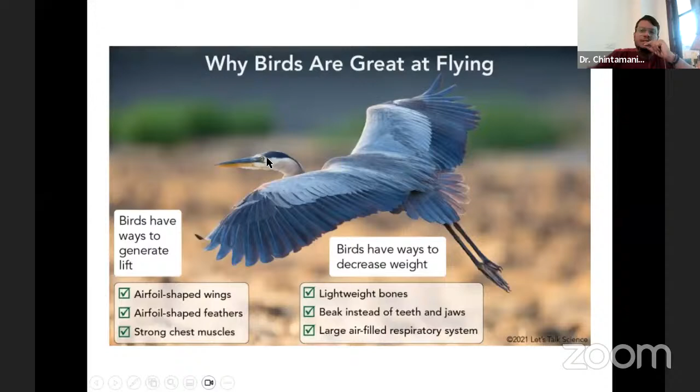Human imagination is always far ahead of reality, and it is that imagination which inspires us to bring these concepts into reality. There is no limit to imagination. Even if you're not in a lab, or don't have access to technology, there's no limit to your imagination, and I think it's important to imagine and then materialize your thoughts about how to go about execution.

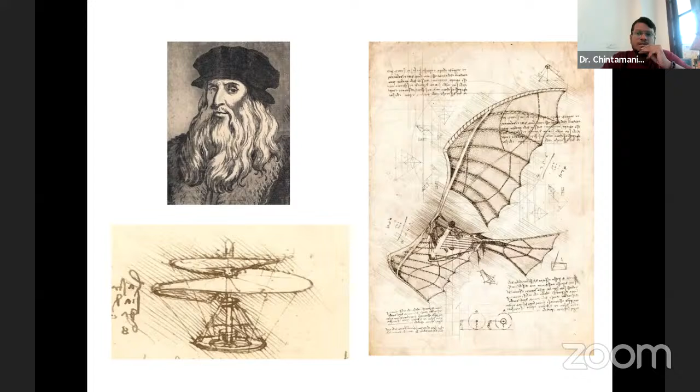These are early attempts where people built mechanical structures and jumped from high altitude, and there were actually deaths also. So my point here is, whenever you are researching a certain topic or experimenting, it's always needed that first you work out a worst case scenario - what are the hazards you should highlight - and accordingly plan your research or experimental activity.

Especially for school students, it's very important when they carry out experiments in certain projects. It's really important that with their school teacher they highlight and carry out the worst case scenario - if this experiment doesn't work properly, what are the worst aspects to deal with.

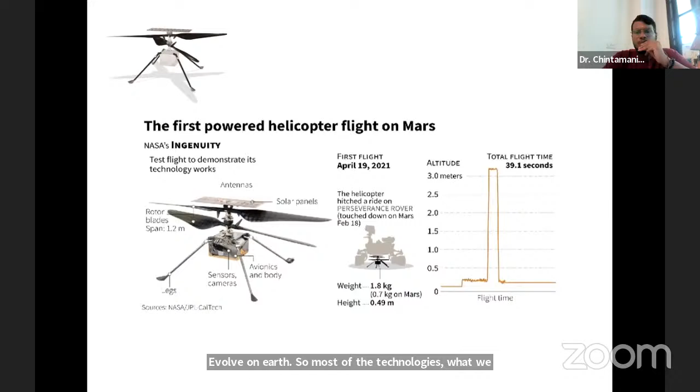I'll not go much into details of this slide, where you can see how this drone has covered the path on the Martian surface. In future, as Elon Musk is thinking about human settlement on Mars, we may have such drone-based vehicles where humans can go from one point to another, or these drones can carry out operations to study the Martian surface with sensors and devices.

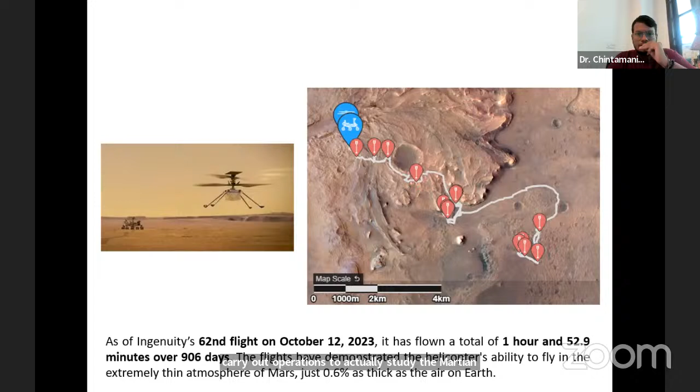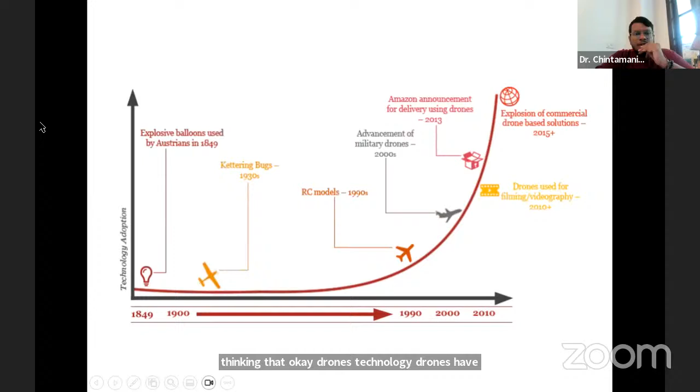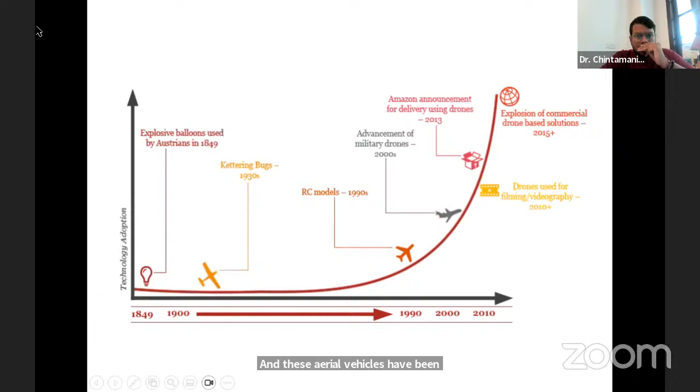Going to the history of drones, you might think drones have evolved only in the past 10 years, but it is not so. Drones come under a generic category called unmanned aerial vehicles, and these have always been explored by us long back. The very first case of an unmanned aerial vehicle, in the form of an explosive balloon, was used by Austrians in 1849.

Unfortunately, people only think about technology when a war scenario comes, where human imagination is pushed to the limits. Whenever war scenarios have come, technologies have been pushed to the limit, and these technologies first come in the war domain, the military domain, and then we think about their civilian applications later.

That is the scenario. So this is where the concept of unmanned aerial vehicles started evolving, in 1849, and then in 1903 the Wright brothers had their first flight, and it started evolving further. Even in World War II, people thought of unmanned aerial vehicles for military applications, where we don't want to utilize a pilot - if we lose a pilot, it is much more loss than losing a machine. So people thought about such unmanned aerial vehicles from World War II onwards. I'll show a few slides.

Then, from 2010 onwards, drones started being used for filming and videography, and civilian applications started emerging. It's very important for researchers to come up with more civilian applications, because they have an immediate impact on society and societal benefits.

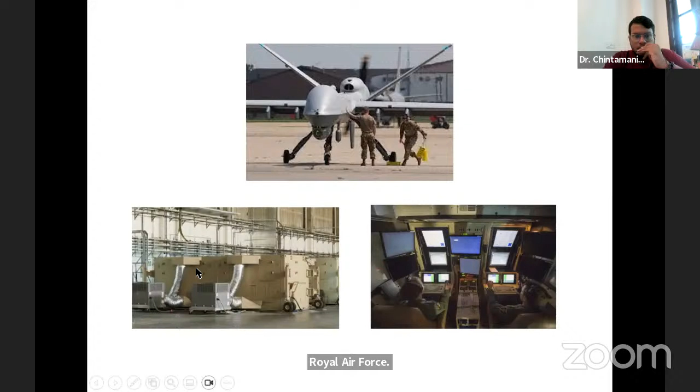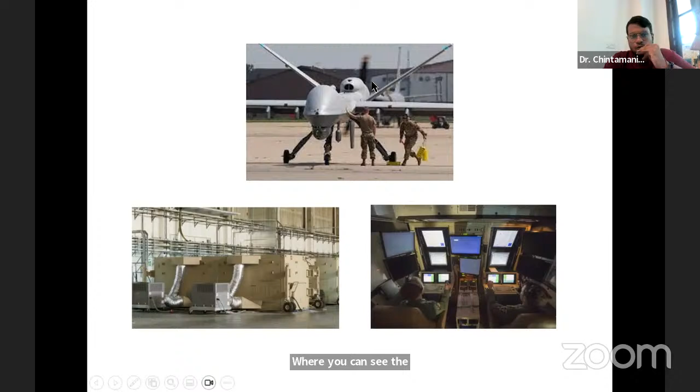This is the recent scenario where you can see these are the freights - not the freights for goods transport, but inside that you're actually having a mobile unit where Royal Air Force pilots are controlling these huge drones being used for military and defense applications. So wherever there is a need, the whole unit can be mobilized.

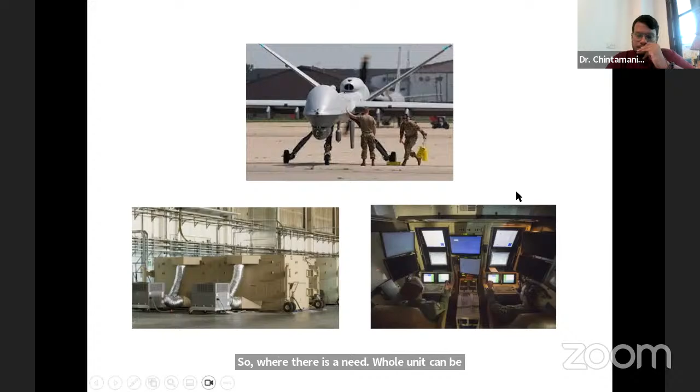This is one of the interesting articles - it talks about mass market military drones, which have changed the way wars are being fought. Some of you are interested in international relations and following geopolitics - the whole current Ukraine-Russia conflict is being completely twisted by drone technology.

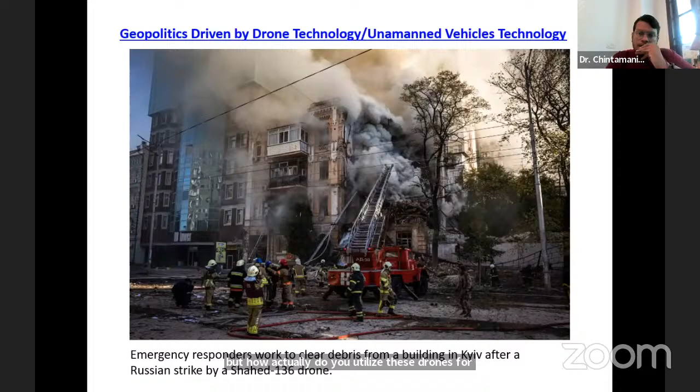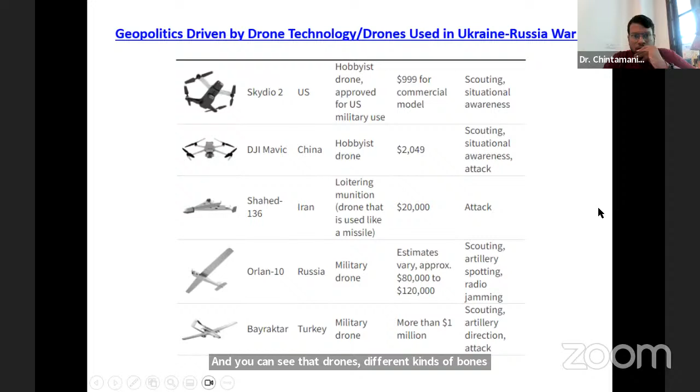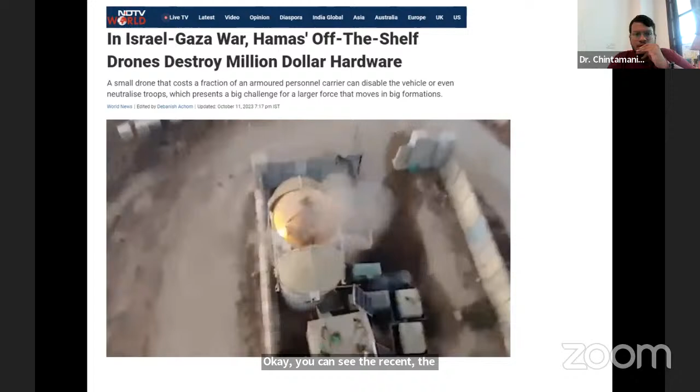The whole point is that drones shouldn't always be used for military applications, but how to utilize these drones for civilian applications like agriculture. But the reality is that such drones are being utilized for military applications - you can see different kinds of drones, with costs starting from $1,000, being utilized for geopolitical purposes. You can see the recent Israel-Gaza war where drones were utilized for surveillance and monitoring. So far I have been talking about the international scenario and geopolitics.

Not that we are behind. DRDO has been very much investing and having interest since the 1990s to develop such drones. These are known as Rustom and TAPAS drones, being developed by DRDO completely indigenously for surveillance and monitoring.

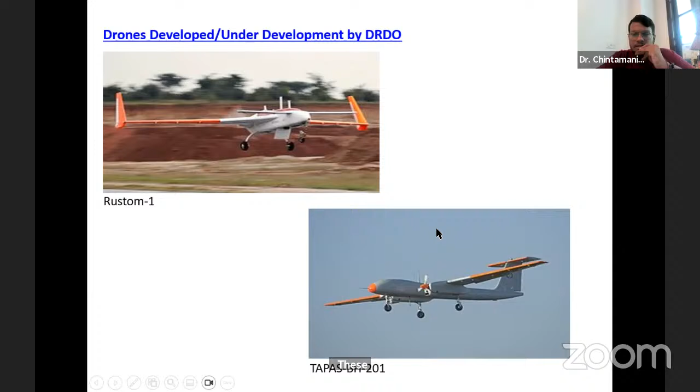All of us as researchers have a responsibility to come up with such societal applications of technology.

In fact, there was a very big event organized in Uttar Pradesh last year at the Air Force Station Hindon, which showcased the status of drone technology in India. Not only military drones, but survey drones, agricultural drones, fire suppression drones, and logistic drones were actually showcased during this event.

So from a student's perspective, there are so many domains through which you can contribute to drone technology. All of you present here, you may be from some of these backgrounds, and you might be thinking that you have to be an engineer or a researcher working in drone technology, but that is not so.

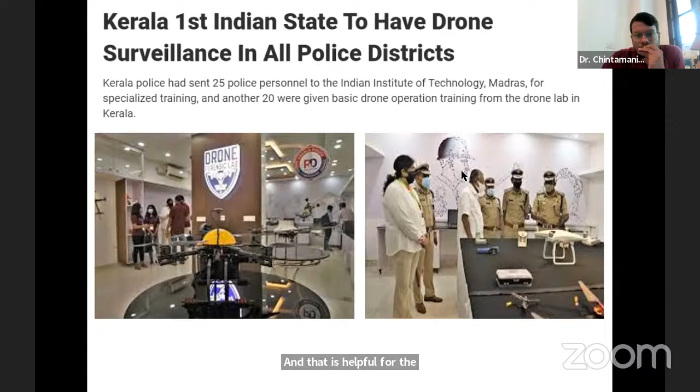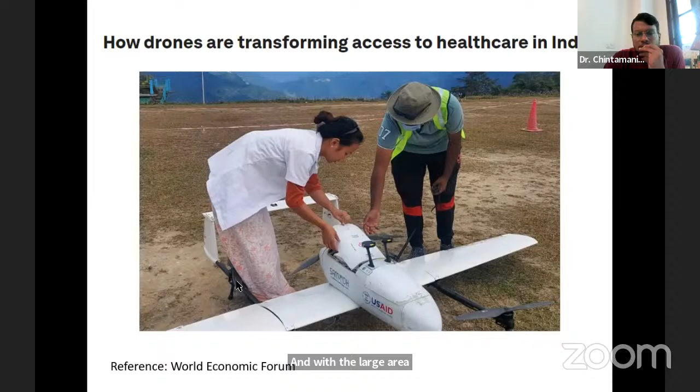During the COVID times, there have been initiatives in India, especially in the Northeast, where fixed RC wing drones were utilized for supplying medicines, and with a large area network, these drones were sent from one location to another.

And even in Dehradun, Tata came up with a fixed wing drone-based service where they could supply medicines.

As I spoke about drones in agriculture, there are different applications which I'll try to cover based on the time we have—I think we have one hour, right? So I'll try to cover the slides.

There are different schemes launched by the Government of India. One is the Kisan Drone scheme, where if you have the official farmer certificate, you can buy a drone at 50% subsidy. It all started with the liberalized drone policy which came into existence in the year 2021, and subsequently different initiatives and policies with respect to different domains were launched.

Coming to the overall application of drones, you can have hobby drones which are being used for fun, recreation, photography, racing. There have been racing events also, so if there are engineering students or school students present here, they can actually participate in such racing events. The commercial and military aspects I have already covered, so I'll go to the next slide.

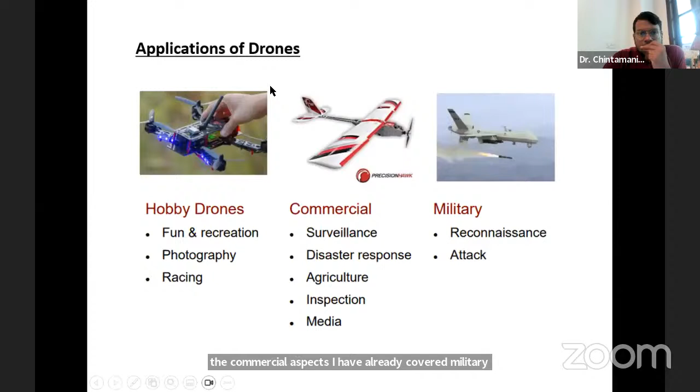The applications of drones - even these we have covered somewhat. Coming to agriculture in detail, I have slides on agricultural applications also at depth, but depending upon time we'll decide if those are to be covered.

From the agriculture perspective, you can utilize drones for crop health analysis, understanding the nutrition or water levels, detection of pests and diseases by making use of hyperspectral sensors. Generally, most of the time, people are utilizing drones for spraying fertilizers and pesticides. That has been the frequent use for drones in India, and very less utilization is being done for soil analysis, but these are also applications one can have using drones.

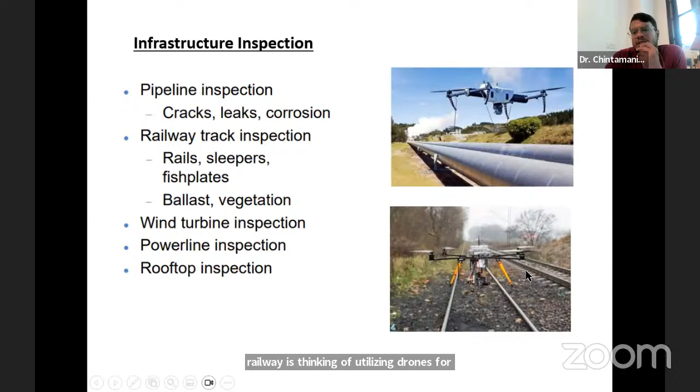India has the largest railway network in the world, and Indian Railway is thinking of utilizing drones for monitoring, surveillance, and there have been sometimes terror activities also. So to stop these activities, drones can be utilized apart from track inspection.

India also has pipelines for water, gas, and oil, and these pipelines also regular inspection can be carried out using drones.

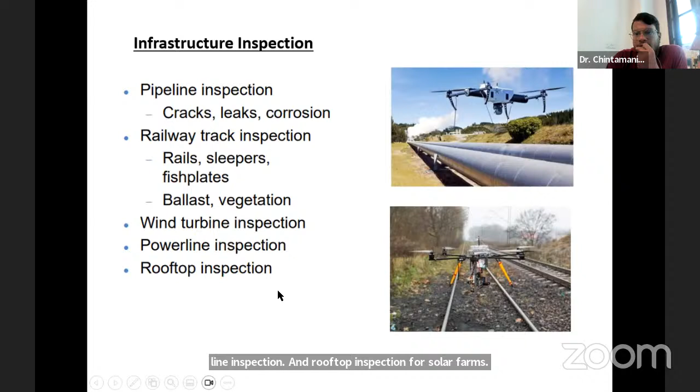The other emerging areas where drone technology, drone-based services are coming up - lots of company startups are coming up in this area. One is wind turbine inspection, where on a regular basis you have to inspect wind turbines if there is a damage, and accordingly the report has to be created. A power line inspection and rooftop inspection for solar farms, where drone technology is playing a very significant role.

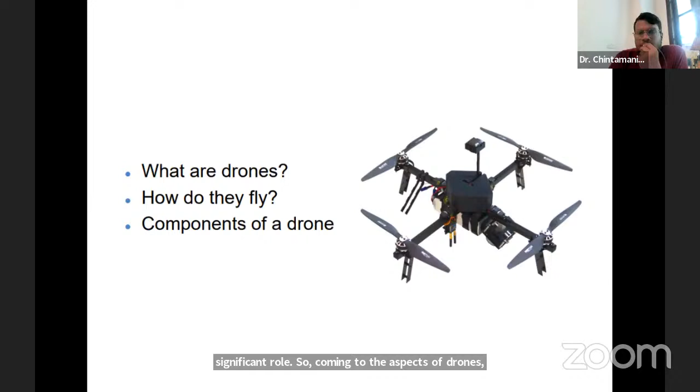Coming to the aspects of drones, I'll quickly cover what do we mean by drone, how do they fly, components of drones - this is a basic aspect we come up to.

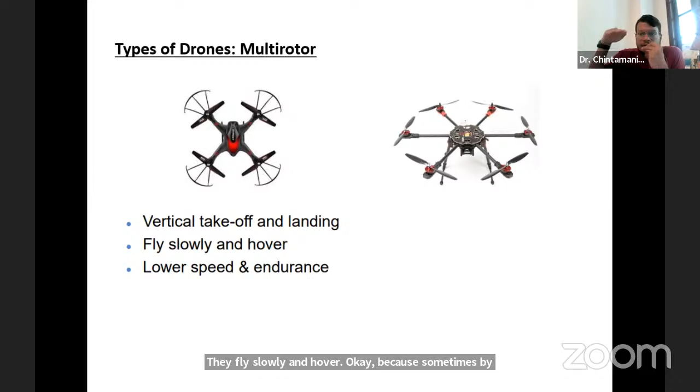Generally what we see is a multi-rotor drone where you have these propellers. Generally the number of propellers vary - minimum these are like four, and then they start increasing in numbers. These multi-rotor drones are capable of vertical takeoff and landing, they fly slowly and hover, because sometimes by hovering at a certain distance you can carry out measurements, whereas when you are moving you cannot carry out these measurements. Depending upon the propellers, they are called quadcopters, hexacopters, or octocopters.

Why do we increase the number of propellers? Because suppose if it has to lift a heavy object, then it has to counter gravity, and the more gravity you have to counter, you need to have more thrust. So to do so there is no option than increasing the number of propellers, and even maybe the size of the propellers, because that much thrust has to be created to counter the gravitational force.

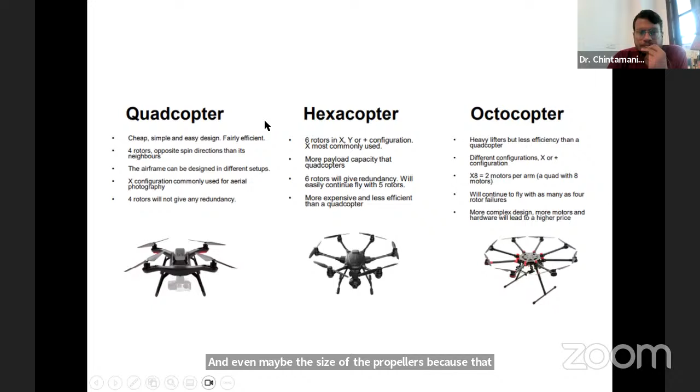Then you come up with other kinds of drones which are called fixed wing drones, where there are not so many propellers. You can see the flying bird-like structure - you have a wingspan, and then at the front or back you have a propeller. These kinds of drones cannot fly slowly or hover. They require a small airstrip to take off and for landing, and wherever there is no such strip ready, you need to actually launch them from a launch pad. You must have seen in the past slides where typically for military applications they are kept in shells, and then launched from the shell where there is no need for an airstrip.

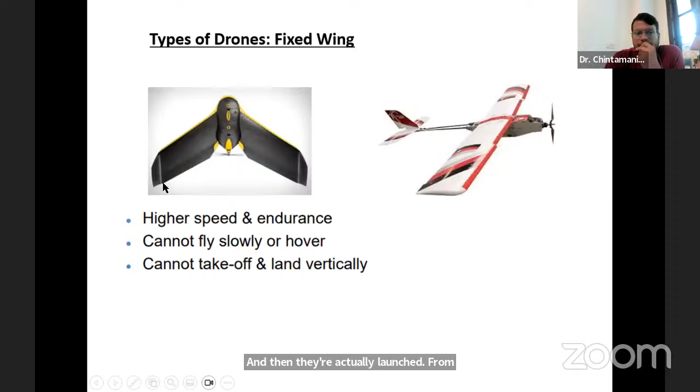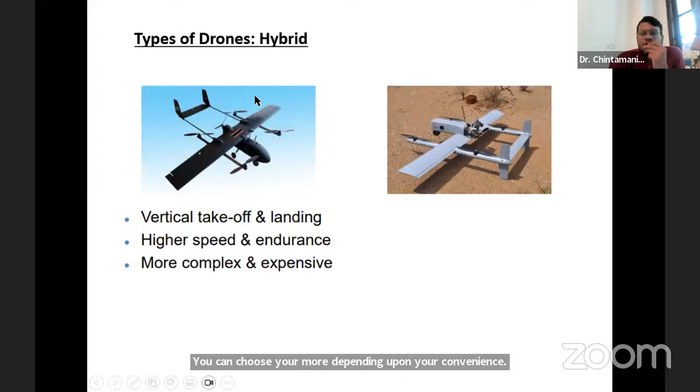Then you come up with hybrid drones, which utilize both properties we have seen earlier - the multi-rotor aspect and the fixed wing aspect. Typically military drones are made in such a format because depending upon the conditions, or if the airstrip is damaged, you can switch into the multi-copter mode where you can have vertical takeoff or landing, or where you have to go at very high altitude carrying out surveillance or monitoring, you can switch to a fixed wing drone. Or if there are disturbances in weather, you can choose your mode depending upon convenience. They are complex to build and expensive, so not many drone companies will offer hybrid drone based services and products - mainly for military applications you will come across such drones.

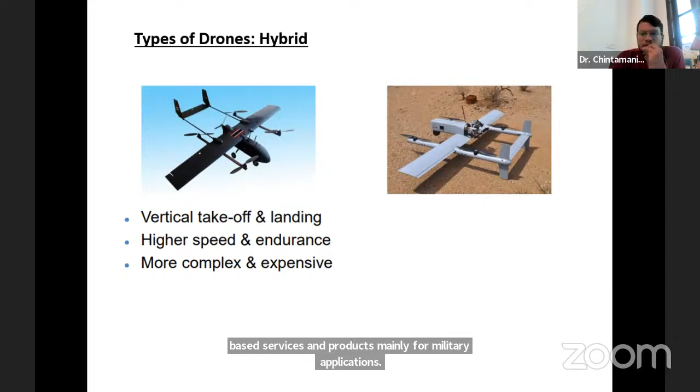So what kind of sizes do these drones have?

So you must be thinking, okay, what can be such an application? It's not just for spying. Suppose you are a zoologist, or you are studying animal or bird behavior. You want to study birds, but you don't want to send a huge drone like this because the behavior will be altered. So you will send this kind of drone where the birds will not get agitated, and you can actually study the bird behavior or animal behavior using these kinds of drones.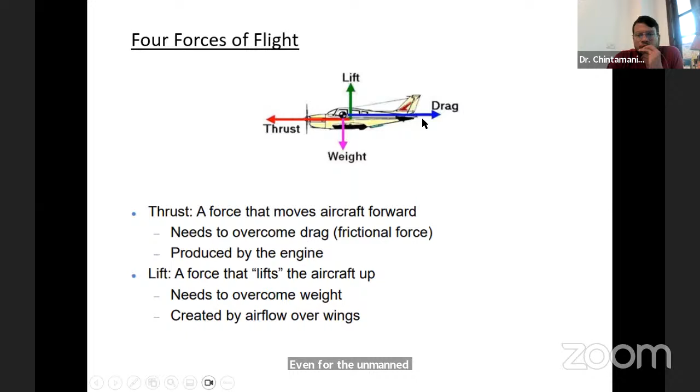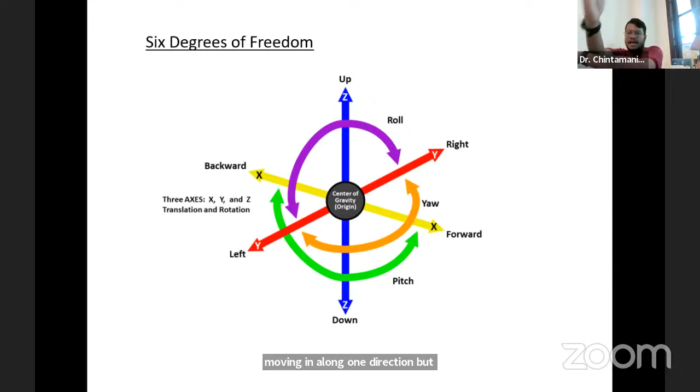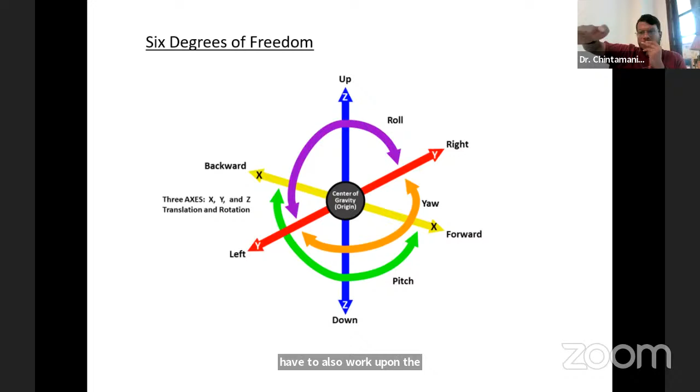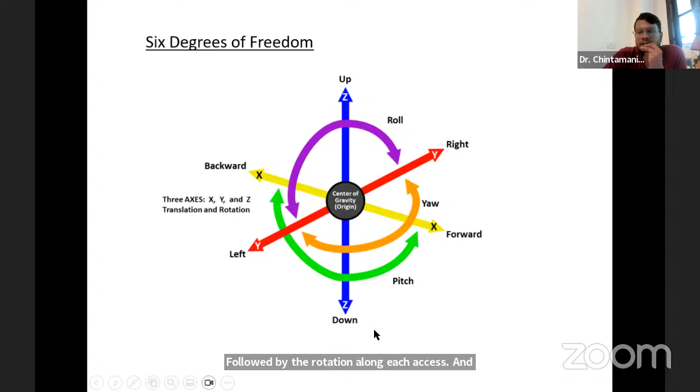And then when you have a drone, you are not just moving along one direction, but there are three directions - x, y and z axis. And for efficient flight, you have to also work upon the rotation of drones along these axes. So typically, you are having a translational motion along x, y, and z axis, followed by the rotation along each axis. The combination of these movements will result into an efficient drone trajectory.

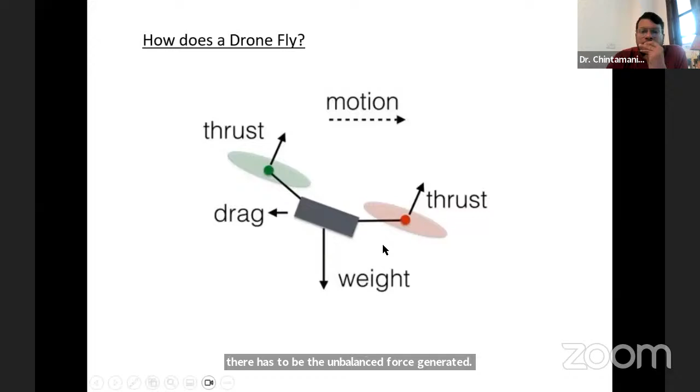So for example, if the drone has to move forward, it has to have an unbalanced force in this direction, because then it has to tilt - otherwise there is no unbalanced component, without which the drone cannot move forward. So to generate thrust, there has to be an unbalanced force generated. Accordingly, one has to deal with the rotary aspects of the propellers.

Okay, so coming to the components of drones, I'm sure most of you are aware of them. So you have a frame, then you have a motor - this is a brushless DC motor to which the propellers are attached, and the rotational speed of these propellers is controlled by separate speed controllers. If there are nano drones, the speed controllers are actually on board, through which the rotation of these propellers is maintained.

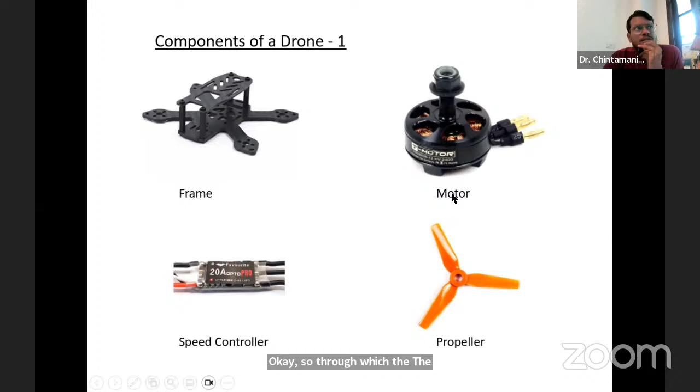Then you have a flight controller, because that is like a CPU - it distributes power, it distributes the signals to the propellers, and you can actually put your own code for the flight trajectories. You also have the radio control mechanism - you have a radio receiver at the drone end, and if you are manually or autonomously controlling, you require a transmitter and the drone battery, because everything requires power.

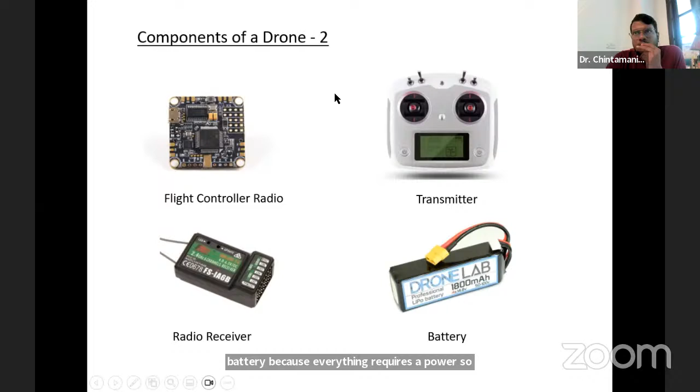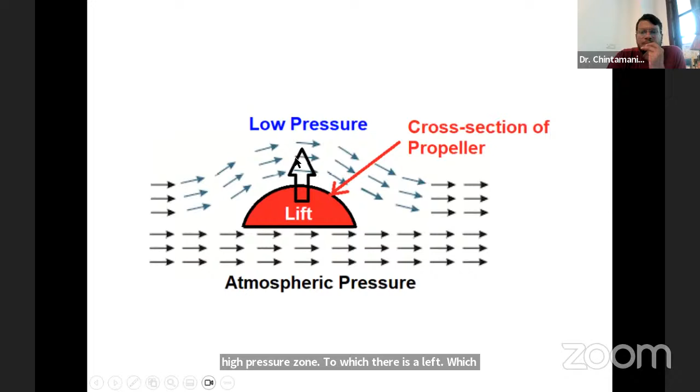In case of the quadcopter or multicopter drones, you are actually creating such low pressure and high pressure zones through which there is a lift which counters the gravity. That is the basic principle behind the multicopter drones. So by having multiple propellers, you are creating a thrust which will counter against the gravitational force.

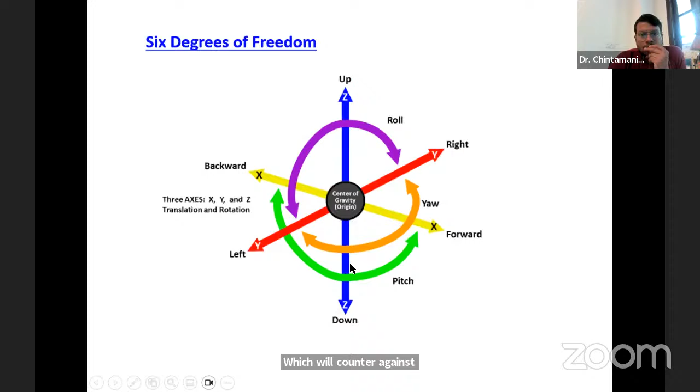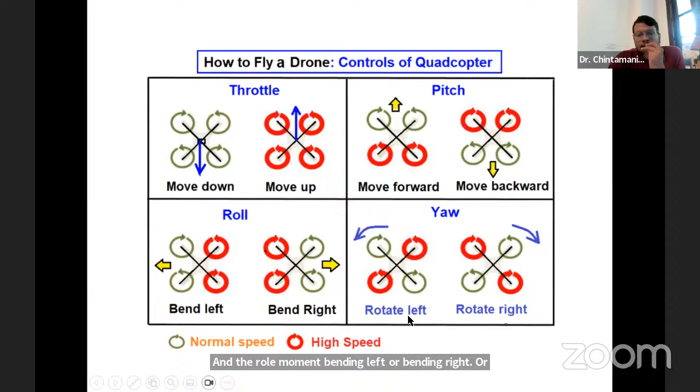Depending upon how these propellers move in certain directions, you can have different kinds of motions, like throttle going up or down. You have a pitch movement moving forward or backward, and a roll movement bending left or right, or rotating leftward or rightward.

I'll try to skip this because it's not a very technical talk I want to give. Students who are interested can always build an in-house laboratory for drones.

Generally when we deal with drone aerodynamics, there are computational aspects where you can simulate drones, simulate the airflow around drones, and simulate the thermal or mechanical stresses being generated in drones, so you know how your frame is airworthy.

You can also carry out experimental aspects of drones. I am from the experimental background, so I mostly love carrying out experiments. There are lots of techniques used in drone technology, or aeronautical engineering generically, where you can visualize the airflow around an object using laser-based systems.

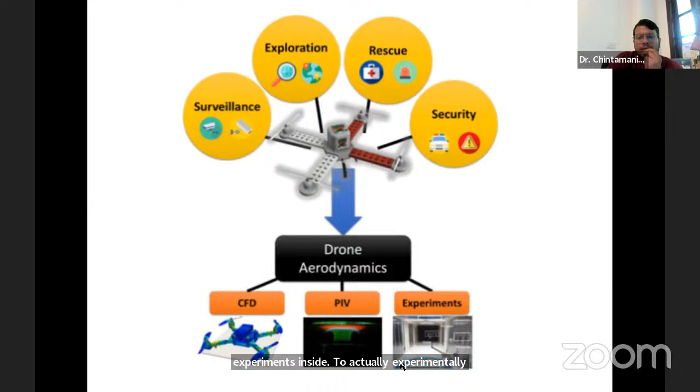You can carry out experiments inside a wind tunnel to experimentally measure pressure, temperature, and study the flow around drones. One can set up such a system integrated with a computer, where you can design your own propeller and see what kind of thrust it is generating.

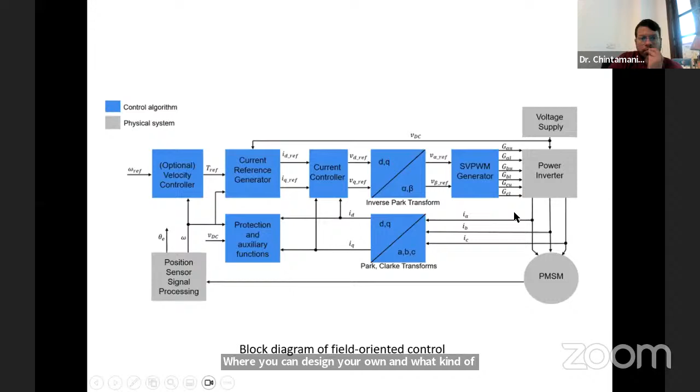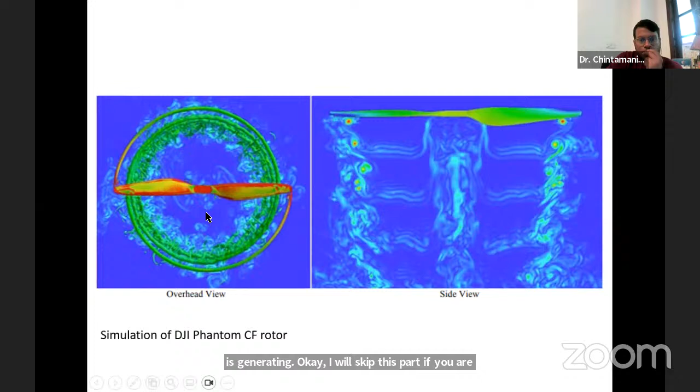I'll skip this part. If you are interested in simulation, you can design a propeller, simulate how it rotates, and see what kind of airflows are being generated.

These are like commercial systems one can have, called load cells. You can test different kinds of motors and propellers at different RPMs to study the airflow and the thrust they generate.

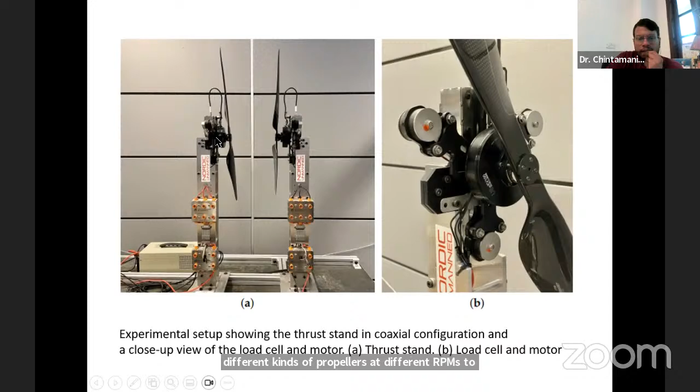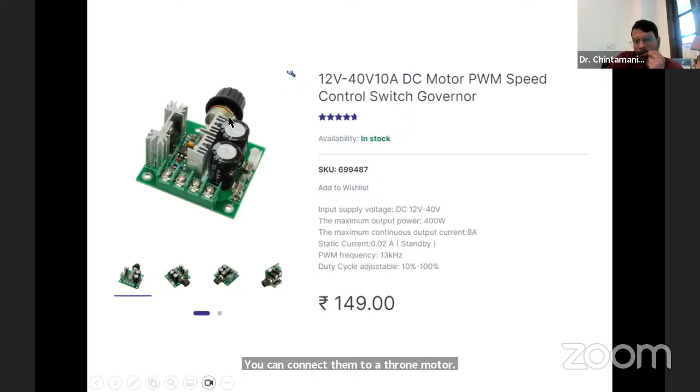If you go online, you can buy low cost pulse width modulated speed controllers. You can connect them to a drone motor, vary the speed, and study the motion of propellers.

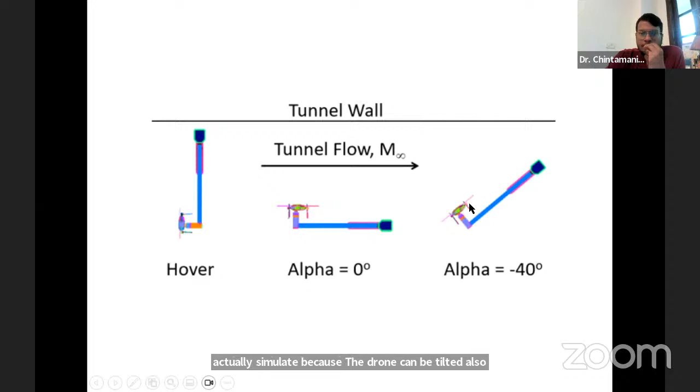Accordingly, the propellers, as they rotate at certain RPMs, can be mounted inside a wind tunnel, and the flow characteristics can be studied. You can study them through computer simulations, and then the results can be matched with the wind tunnel studies.

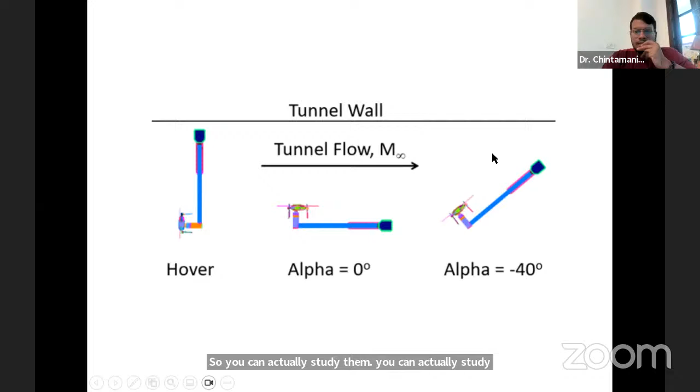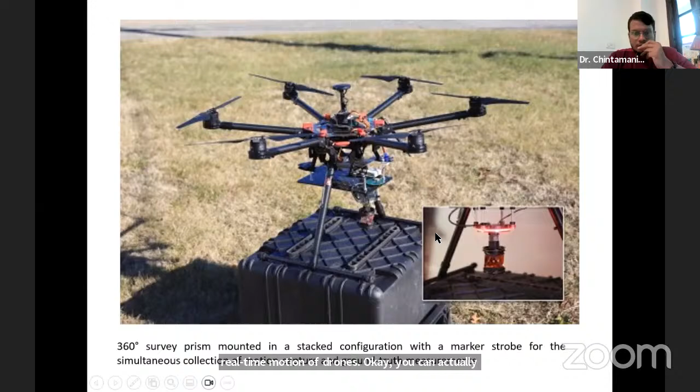There are such systems in which you can carry out the real-time motion of drones. You can deploy nodes attached to the drone frame, and these are captured by what are called motion capture cameras, which are capable of capturing millimeter scale motion of drones.

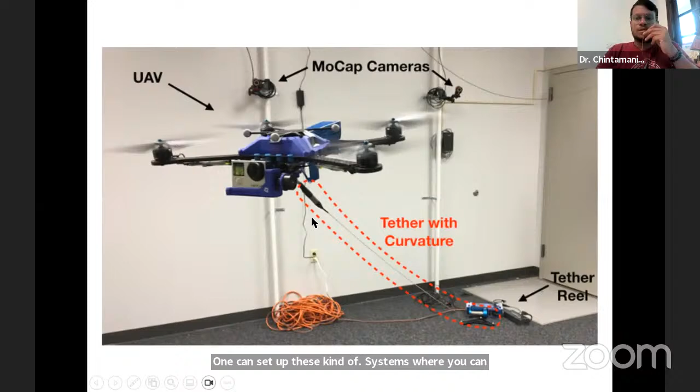If you are designing your own drone frame and want to carry out stability analysis, one can set up these kinds of systems to analyze drone frames. You set up a volume with motion capture cameras and nodes deployed on a drone frame. These systems are actually being utilized by the US Air Force and US Army, and even in India.

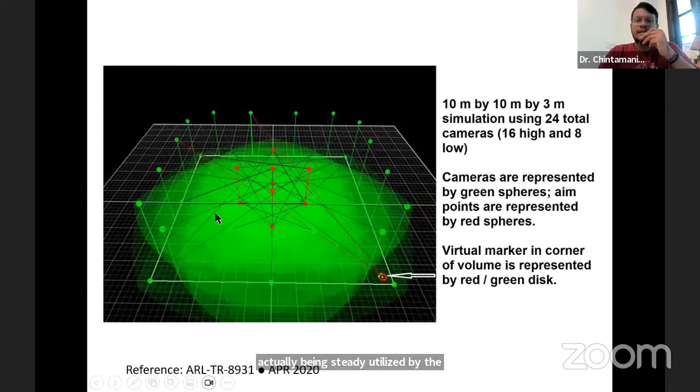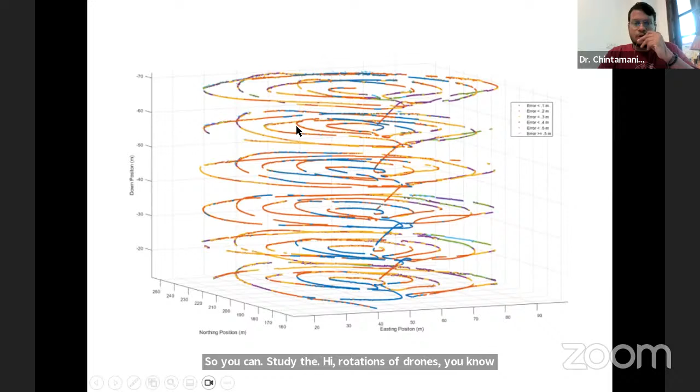So you can study the high rotations of drones. You have a volume in meters, you can see the whole three-dimensional volume, and you can subject your drones to different flying trajectories and conditions, including air conditions, and carry out experimental analysis.

I think I'll stop here. If there are any questions, we can take them.

If there is time, I can also go through the agriculture applications, but I think, ma'am, you can suggest. I think it's 4 o'clock, sir.

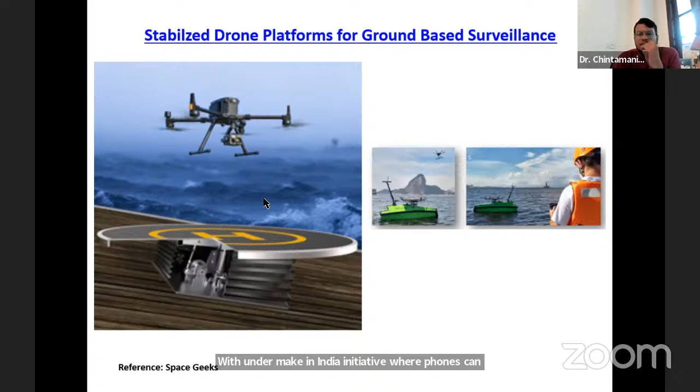We are developing these stabilized platforms - that was during my PhD. I started working with a foreign university, and through that collaboration we began developing these platforms. Right now we plan to materialize these platforms under the Make in India initiative, where drones can land in very harsh conditions on sea-based platforms.

This is typically for harsh weather conditions - if the platforms are moving, this is how the conditions can be stabilized, allowing very smooth landing of drones.

One can utilize drones for the mining industry where there are very rough terrains, and as the vehicle is moving, the drone can have a very smooth landing, because for mining purposes there are very delicate and costly sensors being used. So these kinds of applications we are developing.

Through our other startup, we are developing drone-based solutions. Before I joined this talk, I was actually in a meeting to present this, where we are developing a solution to detect underground buried objects, typically anti-personnel mines for defense applications. Currently, defense personnel go into hazardous areas to manually detect mines, and if by mistake one steps on the location where there is a mine, it results in serious hazards, including death. So what we are trying to address is coming up with a drone-based solution, where the drone can go into this hazardous area and detect the underground buried objects.

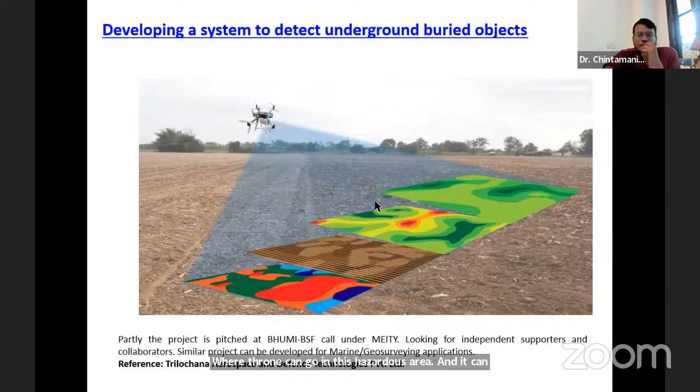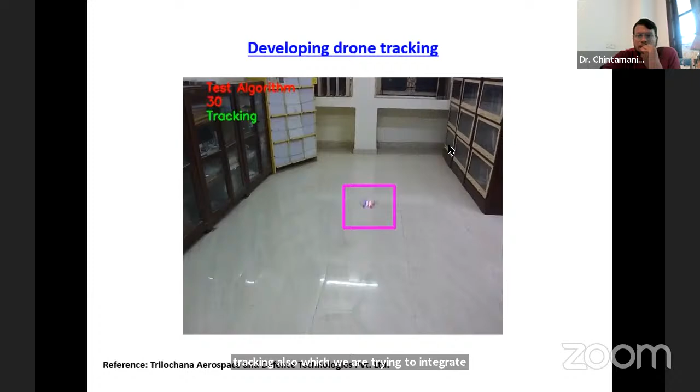We have carried out some experimental studies, and we have come up with real-time drone tracking also, which we are trying to integrate with some other products with respect to drones.

As a faculty and as a startup, since I work in drone-based and satellite-based sensors, we have proposed a G20 student satellite program, where students of G20 member countries can come and get trained in satellite systems and satellite sensors.

Prior to the drone-based platform, we presented a concept for an aircraft-based system, where one can carry critical patients so that they do not experience air turbulence, because small aircrafts carrying patients are always susceptible to turbulence.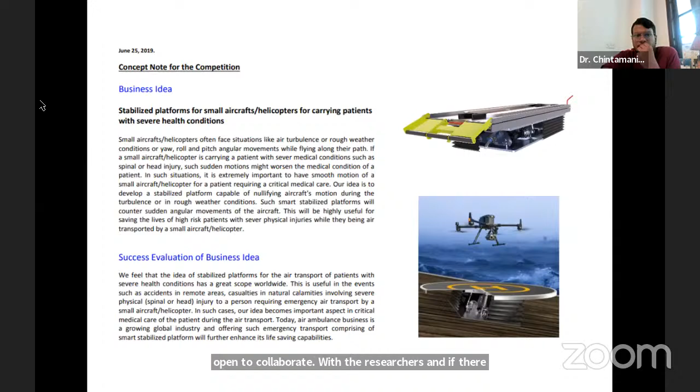I think I'll stop here. If there are any questions.

So one thing, what are the difficulties regarding this? What are the difficulties you are facing in modification or research-oriented work?

There are always challenges, and one has to find a way to overcome them. There are challenges sometimes at the technical level, sometimes with infrastructure, and sometimes you need access to certain technology. Then you have to find the right collaborators and so on. So there are always challenges, but I think one shouldn't get demoralized by challenges. Challenges are always an opportunity.

That is what I tell students and any researchers present here: do not just get bound by the limitations of your research area. See how you can come out of it and what new things you can do, whether you are a PhD student or a master's student.